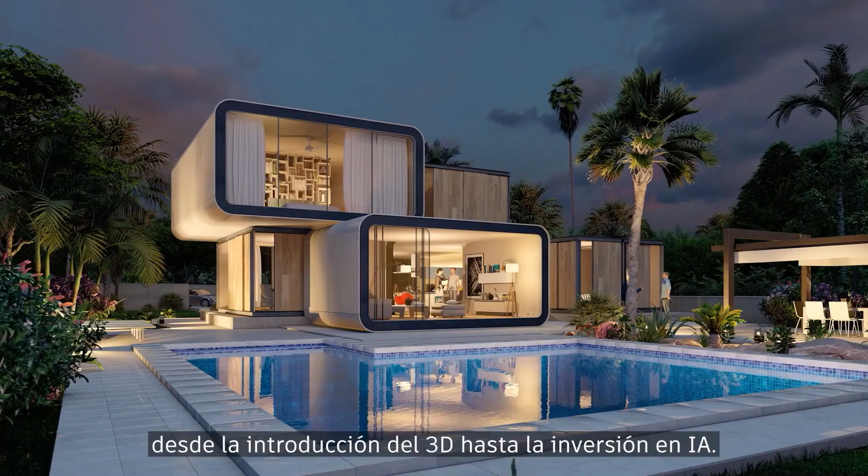From the beginnings of CAD to the advent of cloud, from introducing 3D to investing in AI, Autodesk has been on a journey delivering innovative solutions that inspire designs, connect teams, and accelerate creativity.

And that journey continues with the latest release of AutoCAD. We've been unlocking insights and saving you time with automations. And now with Autodesk AI, it's time to take these capabilities to a whole new level.

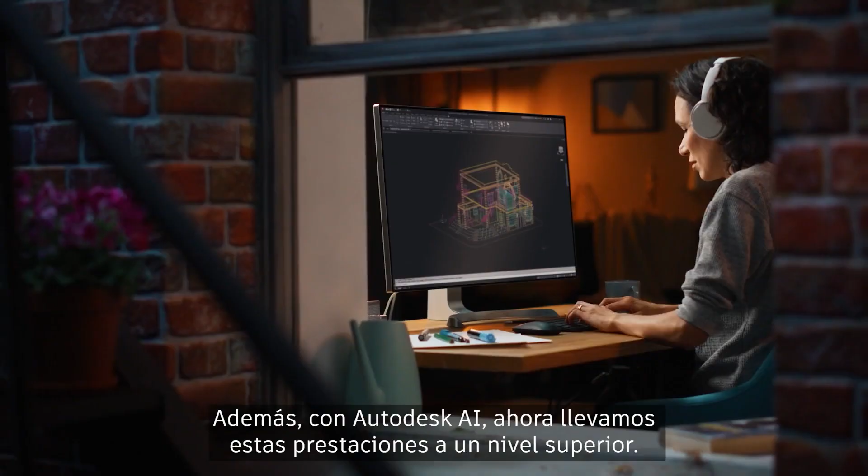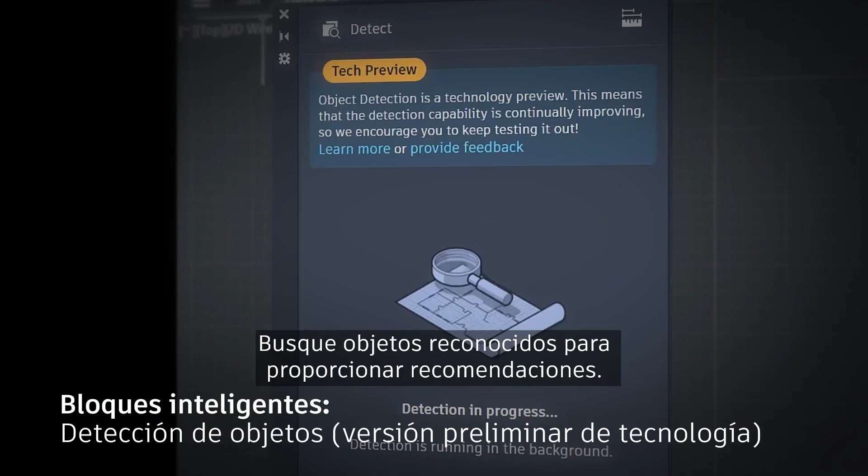Let's start with one that will help you work more efficiently and stay focused on creating quality designs: Smart Blocks. Smart Blocks is a set of tools powered by machine learning technology that can quickly search for matching geometry to convert into blocks, place and replace objects within your drawings, and scan for recognized objects to provide recommendations.

Or Markup Assist, which simplifies the process of incorporating PDF or handwritten markups from collaborators, converting feedback from the original source to objects, and even using Autodesk AI to recommend and automate recognized actions within AutoCAD.

There's also the built-in Autodesk Assistant and My Insights, features that help you work effectively with valuable information.

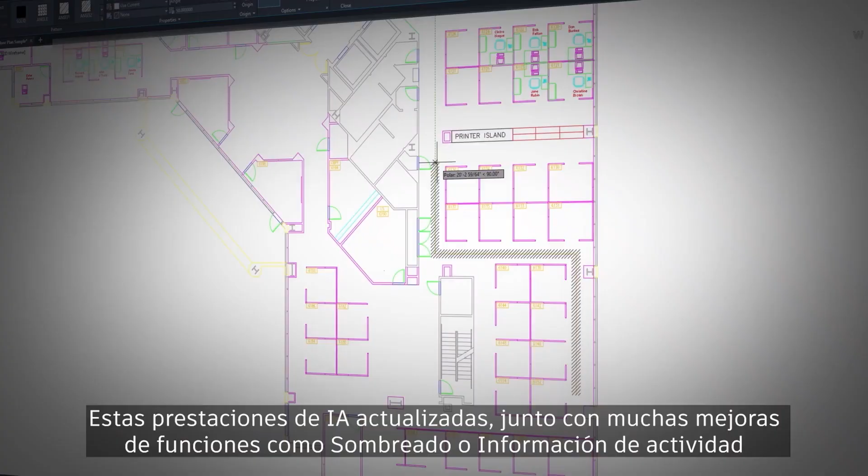These updated AI capabilities, along with many enhancements to features like Hatch, Activity Insights, and integration for Esri's ArcGIS base maps, allow you as designers and drafters to work smarter and accomplish tasks with precision.

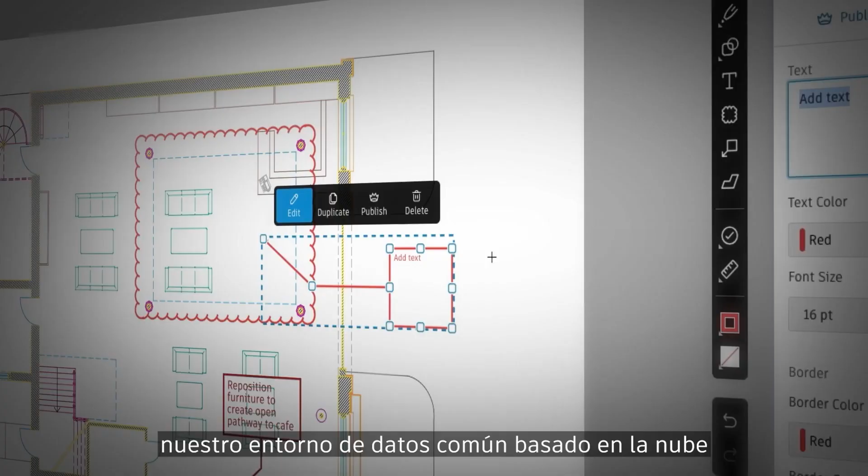And you can further enhance this collaborative experience by bridging design data across CAD and BIM software with Autodesk Docs, our cloud-based common data environment, all while staying connected to one AutoCAD experience to share, review, and capture ideas.

On the go from anywhere on any device. Millions of users have put their trust in AutoCAD to power their creativity as they design and make amazing things day in and day out.

And as good as it is, we feel like we're just getting started. Welcome to AutoCAD.

AutoCAD continues to deliver design and drafting capabilities trusted by millions. We're here not only to talk about what's new, but what we've included in recent releases of AutoCAD that can improve customer workflows.

AutoCAD continues to drive three core pillars that we know are important to the work our users do day in and day out. AutoCAD accelerates creativity to help you focus on the details that matter most, staying connected with teams no matter where you choose to work, and gives the flexibility to work the way you want.

These three pillars are aligned to help customers achieve better outcomes using AutoCAD, to increase workload capacity, manage design and project complexity, reduce overall design time, and improve collaboration.

Next, I'd like to welcome Kayla Tenodorio-Carty, Head of AutoCAD Marketing, to talk to you about the ways AutoCAD is positioned to accelerate creativity.

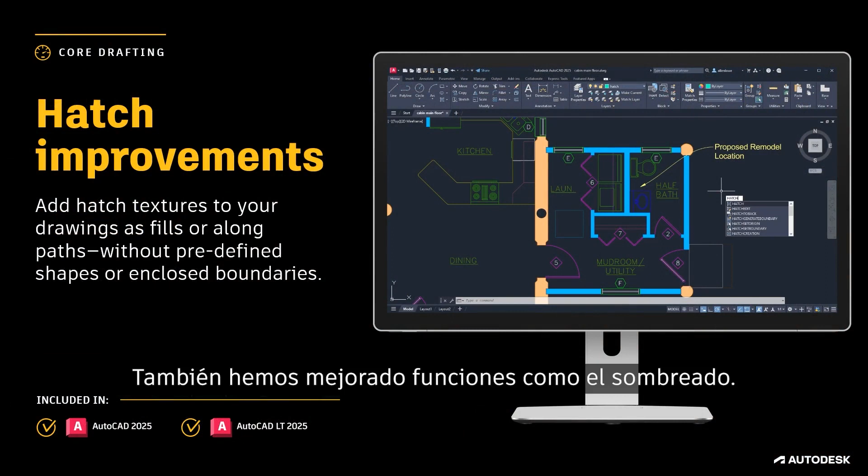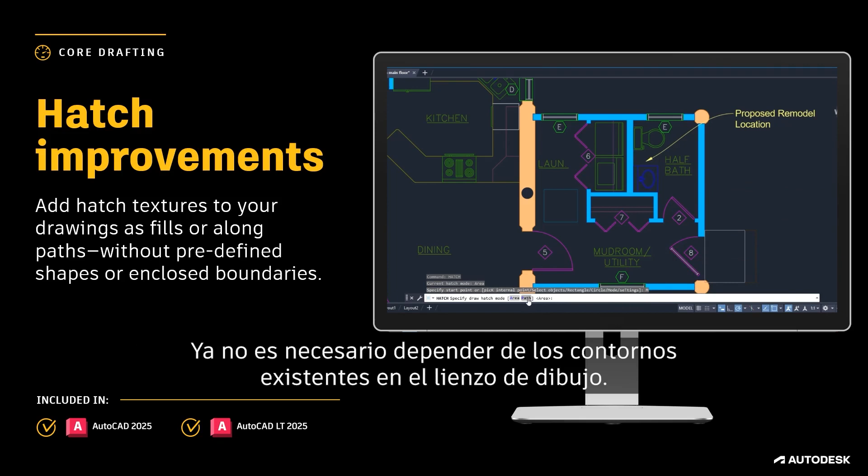We've also improved features like Hatch. Customers will be delighted that in AutoCAD 2025, you now have the option to draw boundaries of your hatch after initiating the command, no longer having to rely on existing boundaries within the drawing canvas.

And you can now create hatch textures along paths. These updates will support the customer outcome of helping designers reduce design time and improve readability in their drawings.

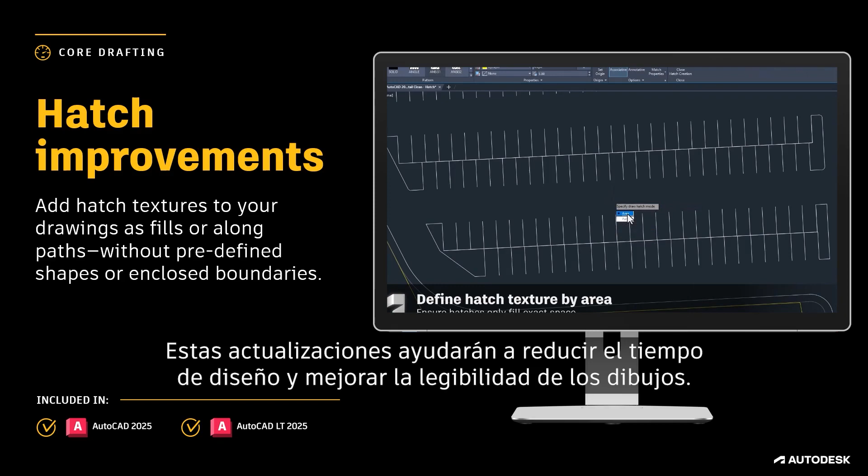Our team has been investing in AI to help you do more. And with the announcement of Autodesk AI, we can now tell you how AutoCAD has been supporting it.

Our advancements in AI are helping customers to meet the moment, not just by increasing productivity, but by giving you tools that help you push the boundaries of what's possible.

And with AutoCAD 2025, we're excited to bring you even more capabilities. Let me pass it back to Shiyam to tell you more about these advancements.

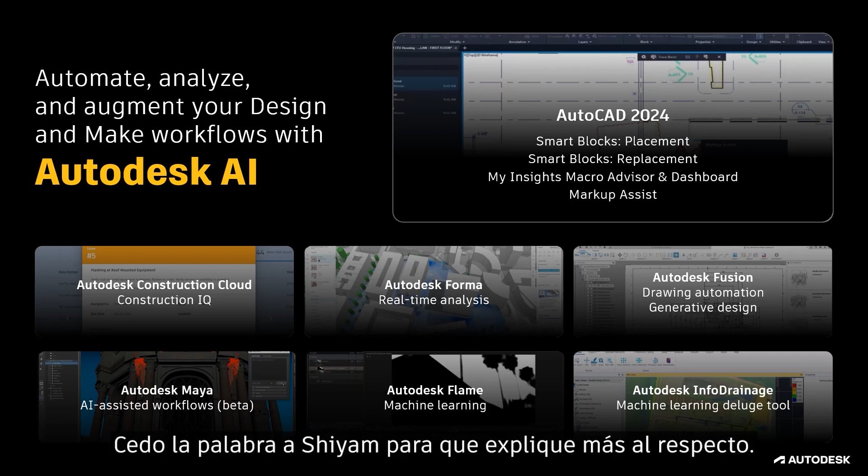Thanks, Kayla. We first introduced Smart Blocks in AutoCAD 2024 with the placement and replacement features. These tools are designed to help customers increase workload capacity and reduce overall design time.

And in AutoCAD 2025, we're continuing to leverage Autodesk AI to improve this core 2D drafting experience.

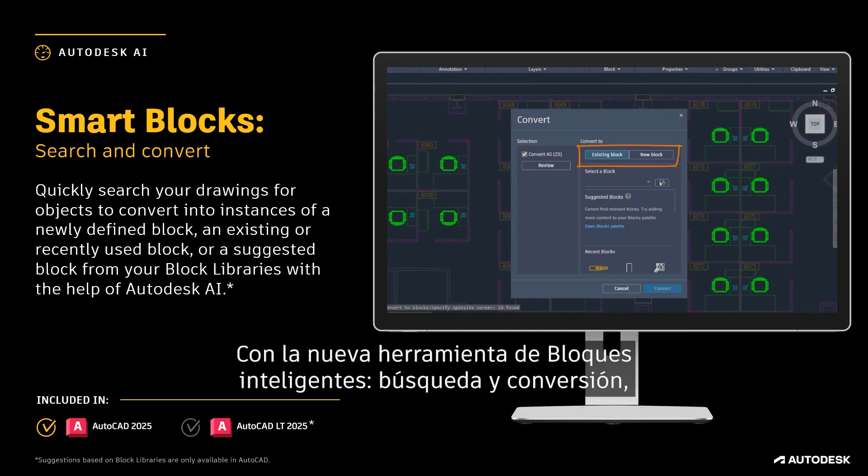Using the new Smart Blocks Search and Convert tool, users can quickly organize geometry into blocks, providing options to convert them into instances of a block with the help of Autodesk AI.

After testing this feature during the beta, Joe describes Search and Convert as a more efficient way to work with blocks. With the new Smart Blocks Object Detection Tech Preview, customers can scan drawings for objects to convert into blocks.

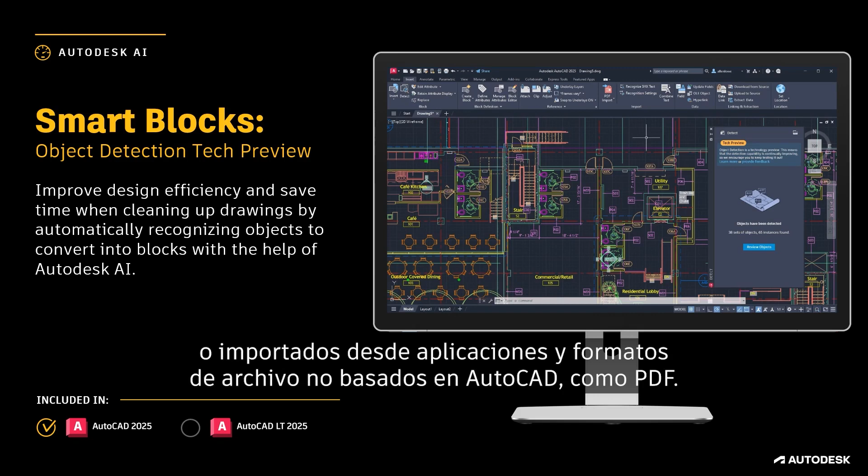This tool is designed to help save time when cleaning up drawings that have been drafted without the use of blocks or imported from non-AutoCAD-based applications and file formats like PDF.

First introduced in the 2024.1 update, Autodesk Assistant gives customers quick access to help resources using the built-in palette. With AutoCAD 2025, Autodesk Assistant is now enhanced with Autodesk AI, using a conversational interface that can generate responses. Customers can reduce overall design time by asking questions related to AutoCAD features, troubleshoot design challenges, and connect with an Autodesk support agent so they can continue to work without having to leave AutoCAD.

Marcus described their experience as exactly what they would need from an AI assistant.

Next, to talk about the connected design experience that AutoCAD enables, I'd like to welcome Luke Chomsky, Product Marketing Manager for AutoCAD Web.

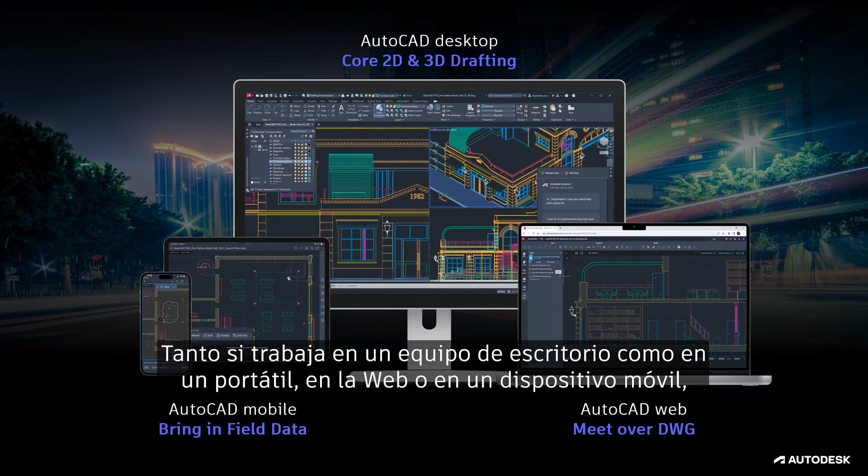AutoCAD enables you to work the way you want with one experience across devices, helping to improve collaboration. Whether you choose to work on a desktop, laptop, on the web, or using a mobile device, you'll be able to capture, share, and review ideas on the go.

AutoCAD Web offers essential drafting and design capabilities for your everyday needs, allowing you to quickly collaborate on a design directly from the job site or wherever you're working. Bring teams together to review and edit CAD drawings via quick collaboration with AutoCAD users on designs. View, edit, markup, and share drawings from virtually any device, allowing you to make assessments and changes in the field, enabling real-time feedback and collaboration.

Customers who have access to AutoCAD on desktop also have access to enhanced features on AutoCAD on the web, like AutoLisp, Batch Publish, and much more.

With AutoCAD on mobile, you can view, edit, or contribute to a drawing from wherever you are, on your iOS or Android phones and tablets. You can also access your files offline, or sketch using a smart pen for a friendly on-the-go experience.

AutoCAD 2025 introduces several enhancements for customers who manage design projects using Autodesk Docs. Autodesk Docs is our cloud-based common data environment available for professionals as a part of the AEC collection. As you may have heard at OTC this year, Autodesk Docs is a great opportunity for AutoCAD customers to improve collaboration. The 2025 feature releases related to AutoCAD and Autodesk Docs represents an opportunity to encourage more customers to upgrade from AutoCAD to the AEC collection.

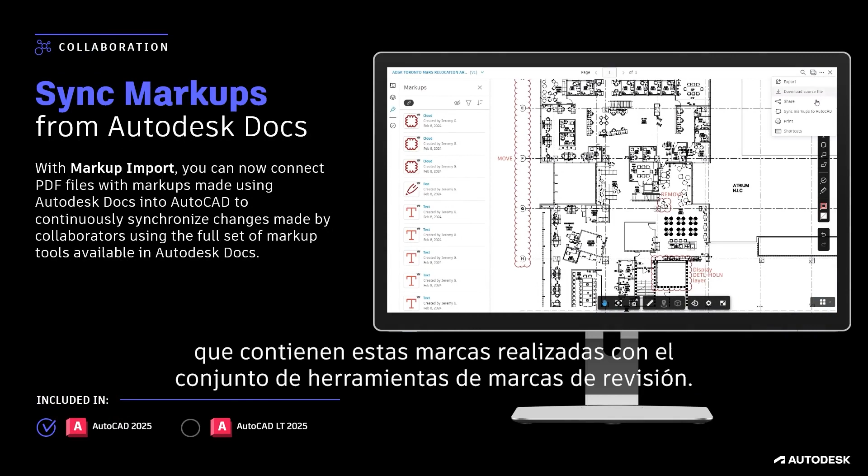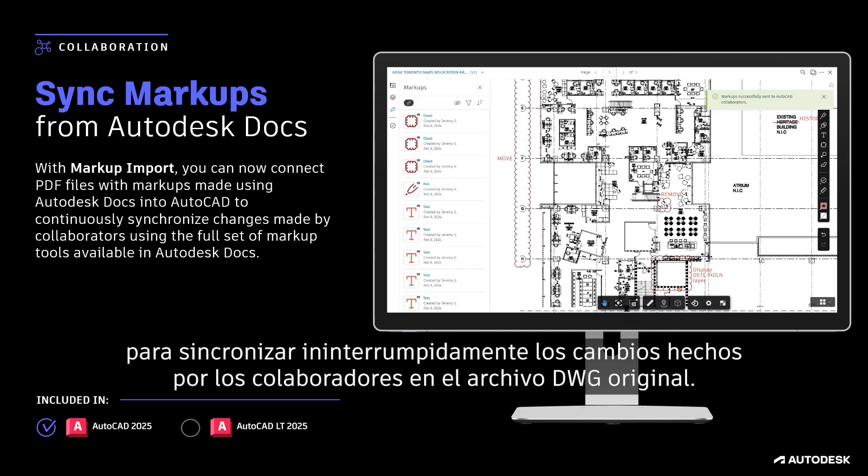With Markup Import, you can now connect PDF files managed in Autodesk Docs that contain markups using the full set of markup tools available. This connection can be initiated from within AutoCAD by the designer or through Autodesk Docs by the project manager to continuously synchronize changes made by collaborators back to the original DWG.

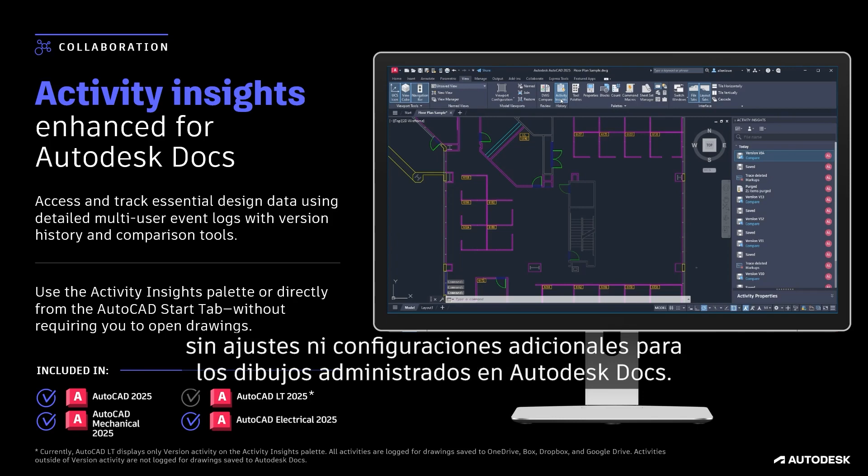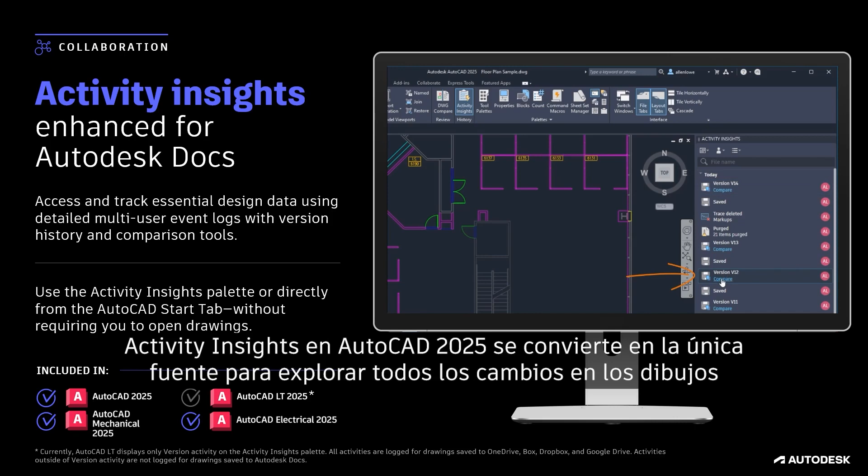Activity insights have been enhanced to include over 35 event types, with detailed properties, along with the ability to filter by DWG version, which requires no additional setup or configuration for drawings managed on Autodesk Docs. By merging features from the previous DWG history tool, Activity Insights in AutoCAD 2025 becomes the one source for exploring all drawing changes over the course of a design with robust file comparison capabilities.

We've also added more capabilities that improve collaboration on files made with AutoCAD specialized toolsets, including Architecture and MEP, which now support automatic synchronization of projects hosted on Autodesk Docs.

We've reviewed the ways that AutoCAD supports productivity through performance enhancements, automations with the help of Autodesk AI, and enhanced collaboration using Autodesk Docs. AutoCAD can also be tailored with functionality that fits discipline-specific routines and workflows.

AutoLISP has been used by CAD teams to automate tasks, set standards, and tailor workflows in AutoCAD. Customers can leverage thousands of previously written programs or create their own. Users can even run some of their routines on AutoCAD on the web and on AutoCAD LT.

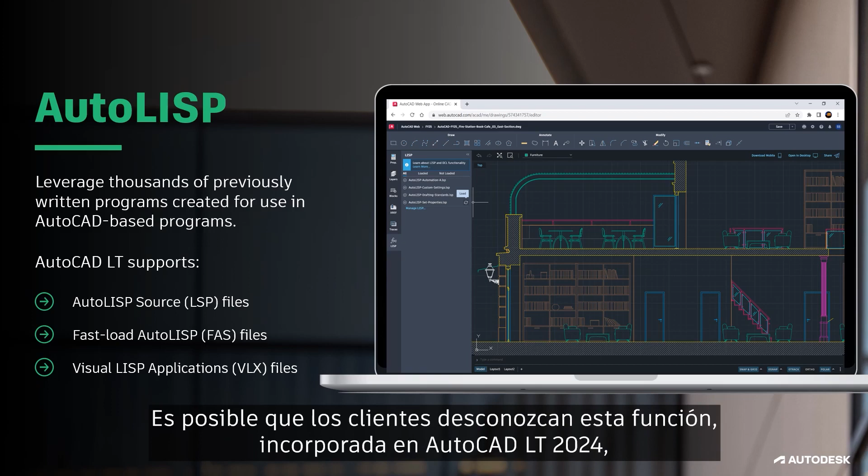This is something that customers may not already be aware of since we released this capability in AutoCAD LT 2024, adding more value to the LT offering.

With the Autodesk App Store, you can access over 1,000 third-party apps created to customize AutoCAD for specific workflows. And by leveraging the AutoCAD API, users can also create their own apps to list on the Autodesk App Store.

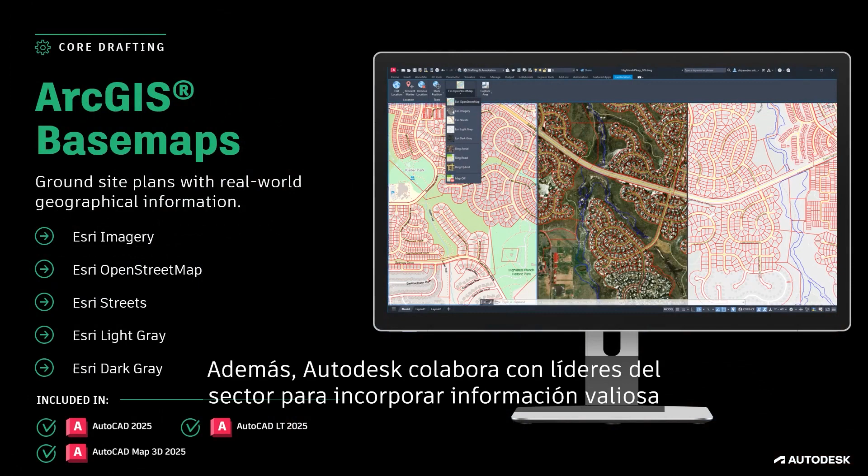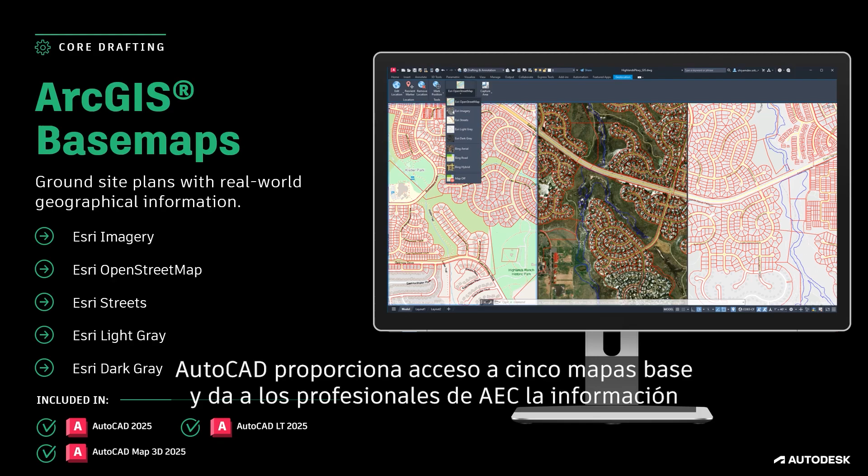Autodesk also partners up with industry leaders to bring valuable information directly into AutoCAD. With AutoCAD 2025, customers can now ground projects with real-world geographical information using Esri's ArcGIS base maps. With access to 5 base maps, AutoCAD provides AEC professionals with the foundations to make informed decisions.

As with every release of AutoCAD, we want to remind you of the incredible value we're able to provide customers with specialized toolsets, included with every subscription to AutoCAD. Across 7 specialized toolsets, users saw an average productivity gain of 63% for tasks completed using enhanced features, functionality, and parts available for specific industry needs.

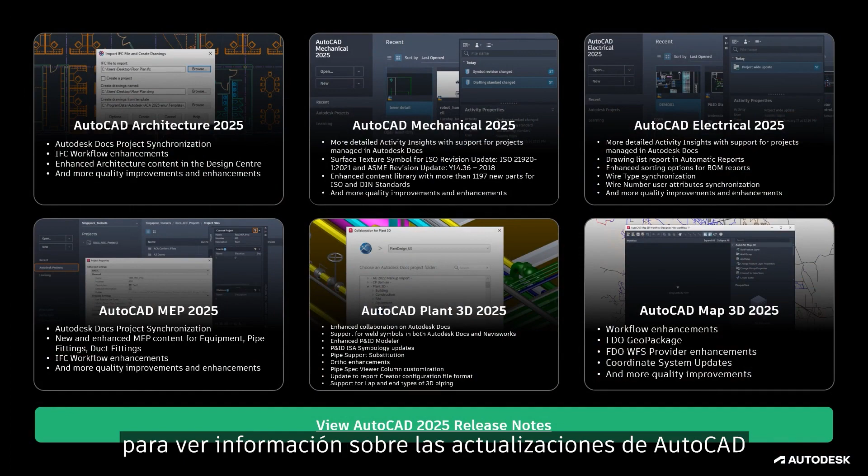Please be sure to review the AutoCAD 2025 release notes for more details on updates made to AutoCAD and the specialized toolsets. The AutoCAD 2025 portfolio represents capabilities trusted by millions and is designed to accelerate creativity with best-in-class tools for 2D drafting, design, and documentation, essential for everyday needs.